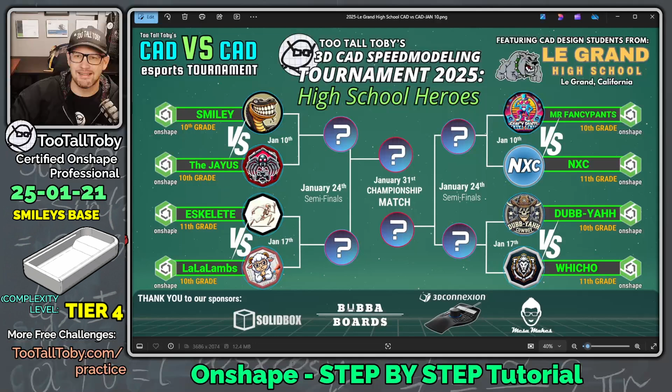And this case is in honor of one of our contestants in the recent CAD vs. CAD high school tournament. So the students from Le Grand High School all got together and competed. And each month I'm gonna go through and recognize a different competitor in this tournament, starting with this first month and recognizing Smiley. So Smiley plays electric guitar. I thought it'd be cool to put together a case that we can hold our electric guitar picks in.

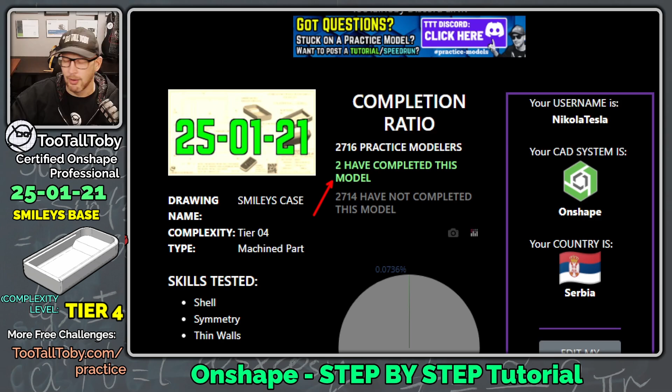So I'm gonna click Get Started here on Practice Models, and we're gonna go all the way down to the bottom. This is a Practice Models premium model. So this is 25-01-21, and 25-01-20, that was the lid. This is the case. So I'm gonna click here to practice, and we can see, wow, 2 people have done this already. So we're gonna become hopefully the 3rd person to successfully complete this challenge. And click here to begin. And go! What is the mass of this part in xx.xx grams?

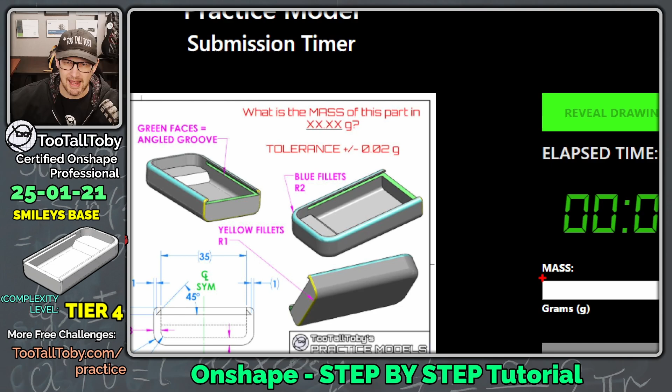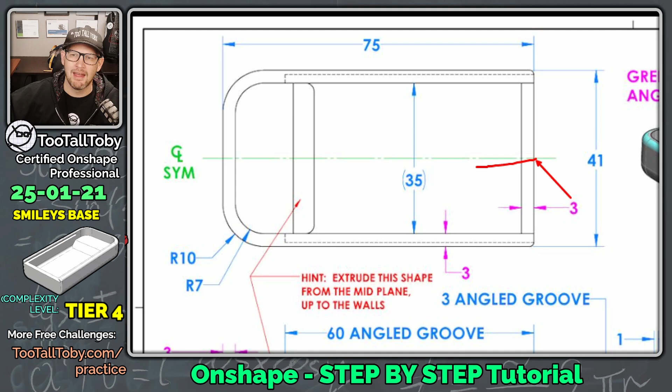So even though the clock is running, I think it's always good to come up with a game plan before we get started. And I think in the case of this model, I'm gonna start by figuring out where the origin should be. And I think the origin is gonna be located right here. The model has symmetry. I think it makes a lot of sense to just have the origin located right there. And so that means I think I'll use the same strategy as last time, where I'll just model up half of this.

So my first sketch is gonna look something like this. So I'll create that line that comes over, I'll create that 10mm radius, create this shape here. That'll set me up nicely for a mirror a little bit later on. Now, once I've got that sketch, 75 by 41/2, then what I can do is I can extrude that sketch down to this height here of 15.

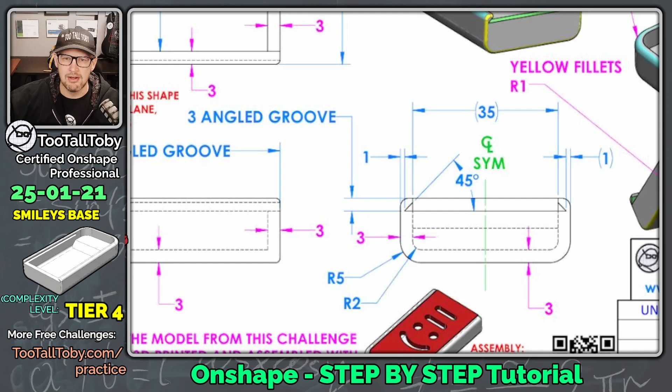And then, because we've got all these wall thickness 3, wall thickness 3, wall thickness 3, well, I should be able just to go in and do a shell, right? We can do a shell command and apply that wall thickness 3 all the way across the board. And you're gonna notice some dimensions like this radius 5 and this radius 2. Well, again, that's kind of reinforcing that I could add that radius 5 first, and then I could shell it and get that radius 2 on the inside.

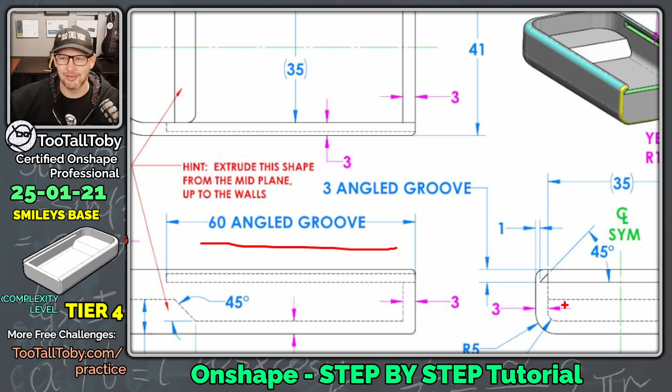Then I think the next feature that I would create would be this groove here. So you see we've got this angled groove. You can see here that the length of that angled groove is 60mm. That matches right up with the rail on the previous part that we created. And then we can see the geometry here for that angled groove. So it looks like it's 35 wide. I think that'll be the same wall thickness, or representing that 3mm wall thickness.

So yeah, in this view here, you can see this wall is the same wall as this wall here. It's all the same face. So that's going to be that wall there. And then that angled groove shape is going to look something like this. It's going to come over, up, over, down, because we're only doing half the model.

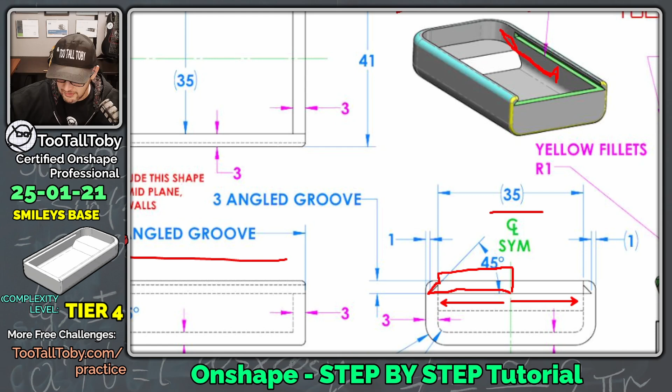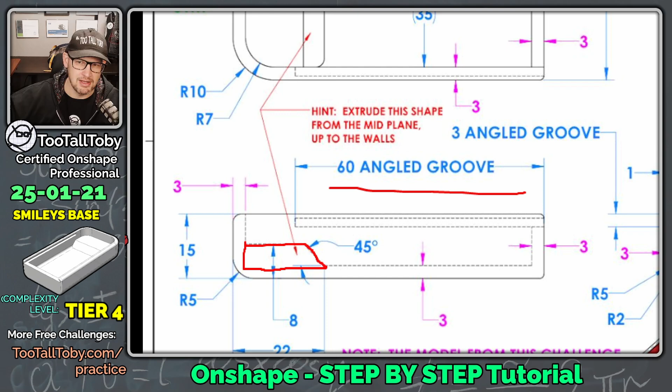And then we've also got this ramp here, this ramp that we talked about to get the picks out of that case. So to create this ramp, it even says here, hint, extrude this shape from the midplane up to the walls. So a nice little hint there. So I'll create a shape that'll look something like this, over, down, back over this way, up. And then we should be able to extrude that right up to the sidewalls and create that ramp.

And then the final features that are on this model are just these final fillets here. So we've got this fillet here, these blue fillets running around the top, and this radius 1. Since radius 2 and radius 1 are both smaller than the default wall thickness of 3, I think it's okay to save those fillets for the end. You probably don't want to have them in there before you do the shell, although I don't think it's really going to hurt you. But there are some CAD packages where that would be problematic.

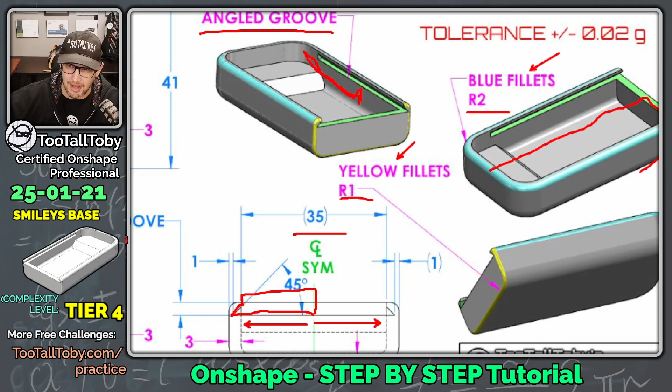So I'm going to save those fillets for the end of the model, and then I should have pretty much everything on one half of the model, and so the final feature will just be a mirror to mirror everything over to the other side. So I know we took a couple of minutes to come up with that game plan, but I think it's always good to come up with a game plan before you proceed with a 2D to 3D conversion.

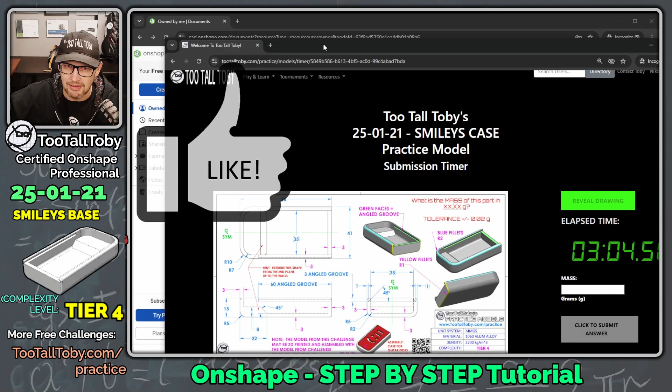And so now what I'm going to do is take this and move it over here to my second screen. Let's bring up our keyboard cam so we can see all the shortcuts that we're using here. And let's choose to create a new document. This is going to be in the public space, so if you get lost or stuck, you could always search for this document in the Onshape public space. I'm going to call it 25-01-21 Smileys case and create public document.

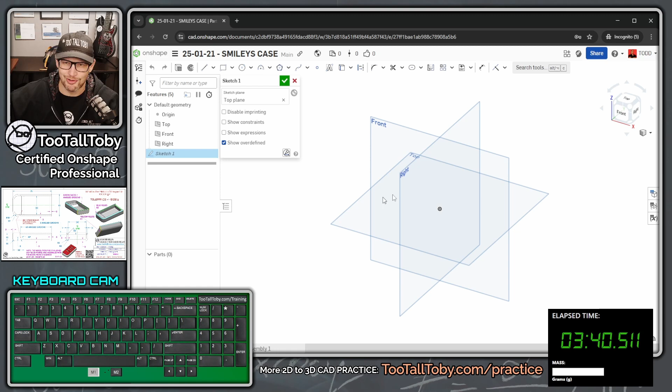And then the first thing I'm going to do is go up here to this hamburger menu and choose to set my workspace units. Workspace units are going to be set here to millimeters and grams. Hit the green check mark, and then I'm going to go top plane, begin a sketch, orient my view, N key, normal to. So I'm looking normal to the top plane. That's where I'm sketching. S key, line, single click, move my mouse over this way, single click, let go of my mouse, 75, enter, move my mouse down this way, single click.

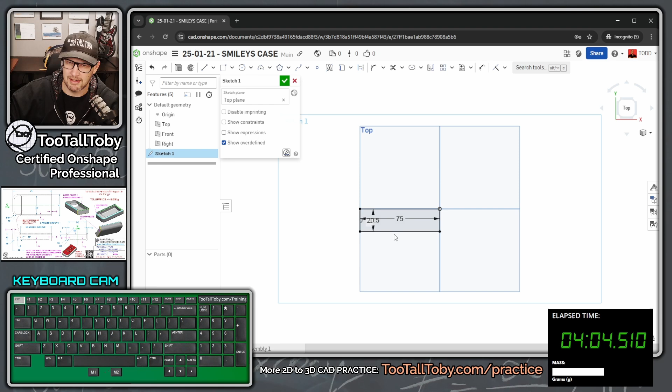This is going to be 41/2. I guess I could have just done this with a rectangle. Move my mouse back this way, move my mouse up this way. Nice fully defined rectangle there. And then I could either add in this fillet here at the sketch level, or I could add it at the feature level later. Honestly, I usually prefer to add fillets at the feature level, so I'm just going to do it as an extra feature here.

So S key, extrude. And this is going to get extruded down to a height. Actually, you know what? Before I move on here, let me go back into this sketch. I'll just show you one more trick. I showed this in the last video, but I think this is a good trick.

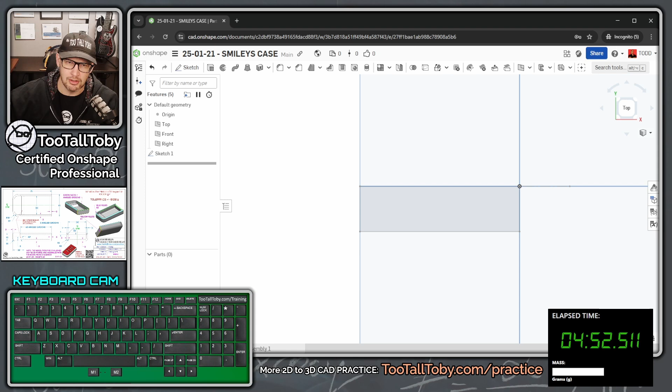If you're going to model half the model, but the customer has given you the full dimensions of the model, maybe what you want to do is create a construction line. So I press the letter Q there to change that line into a construction line, and then get rid of that 20.5 dimension and add in a dimension that goes from this line to the construction line, 20.5, and then go across the construction line. And that gives you a double dimension. And that might be a little bit easier to look at. It might be a little bit easier to work with the customer or confirm the customer's design intent.

So this is what your first sketch should look like. Take a look at my sketch. This should look very similar to your sketch. And now we're ready to S key extrude. Remember, I customized my S key menu, so S key extrude. And then after you jump into the extrude command, you can just press tab, tab, tab. And this is going to go to a height of 15, enter.

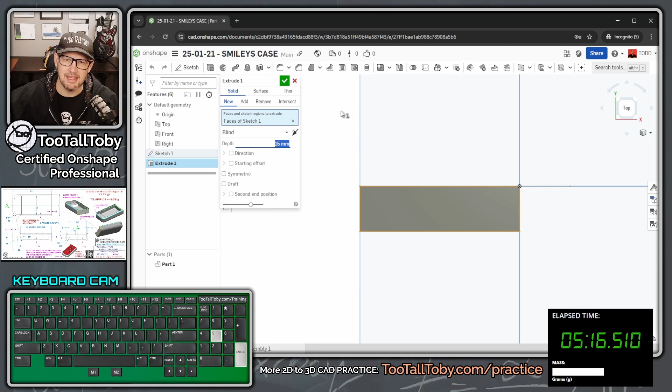And it doesn't really matter if you want to have that extruding up or extruding down. I'm going to have mine extrude down, but it doesn't really matter. It's just a personal preference thing. So if you're going in the correct direction, you're going down, then you can hit the green check mark. And there you go. We'll call that feature Shift N, call that main base.

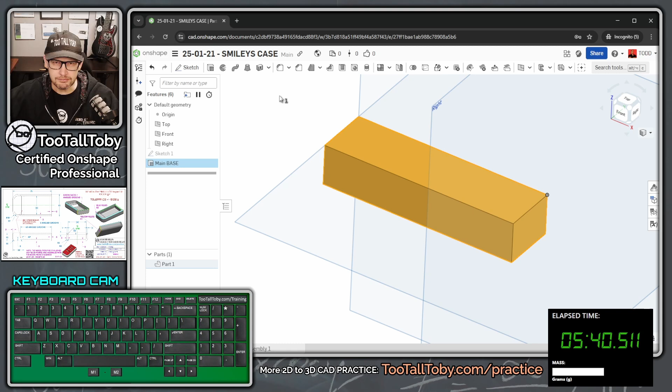And then what we could do is S key fillet, and we can say we want this fillet to have a radius of 10 millimeters, and we click on this edge here and enter. Yes, that looks good. And then we could call that one Shift N fillet front corner. And then we could do S key fillet, and make that one a radius of 5. And then we could click down here on this edge. It looks like that fillet runs all the way around. So because of tangent propagation, that's running all the way around.

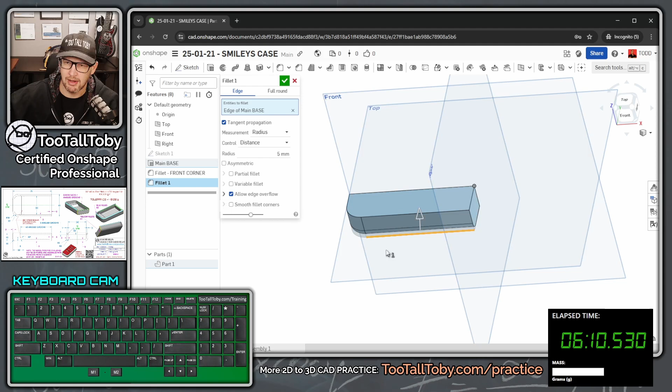So we can hit the green check mark, and then we could call that one Shift N fillet lower edge, something like that. Always good to rename your features. That'll really help you keep things straight. And so now this thing's looking pretty good. I think we're ready to shell this thing. So we're going to say shell, and the shell thickness here is going to be 3 millimeters.

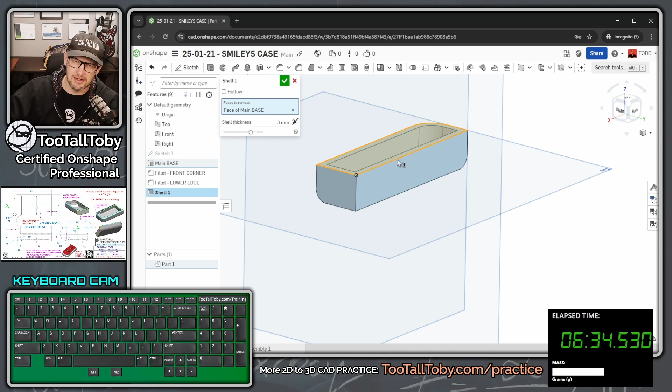And then we're going to remove this face on the top, obviously, but we're also going to remove this face here because remember, we're going to model half of this and then we're going to mirror it across. So remember to get that middle face as well. You should be removing both of those faces when you do that shell. And so once you do that, you can hit the green check mark and boom, there you go. There is your main shape there. I don't think we need to rename the shell. It's pretty obvious what a shell is. So usually I don't rename that one.

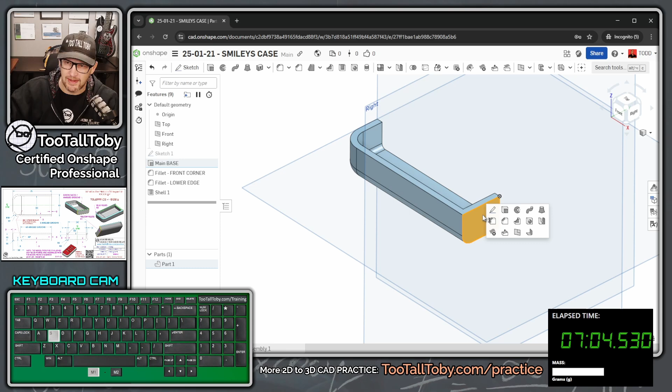So now I think we're ready to add in that angled groove. So you pick this face, S key, begin a sketch, N key, get normal to, S key, begin a line, single click here at the origin, come over to about here, come straight down, come over at an angle, come back over this way, come up to here. And then if you're going to be doing a double dimension, you could maybe create another line here and press Q to make that other line construction.

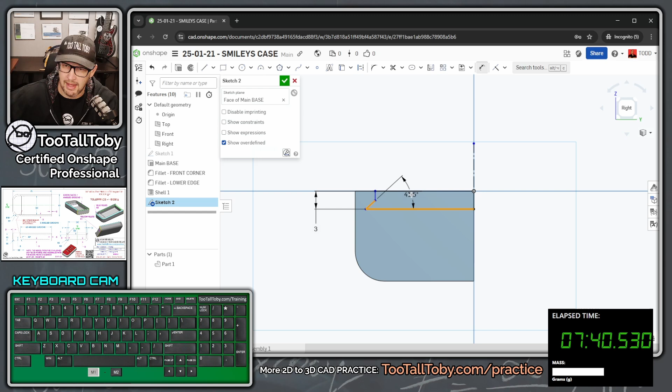I don't think we actually need a doubled line here for this one, because the dimensions that we add here are a dimension for the total height of the groove, which is 3 millimeters, and a dimension for the angle of the groove here, which is 45 degrees. I guess we do have that total 35 from here to here, which we could make collinear to the existing edge, but we could also just type in a dimension there. Both of those are going to work. And then we could create a final dimension from this side edge of the part to this point of the groove, and that is going to be 1 millimeter.

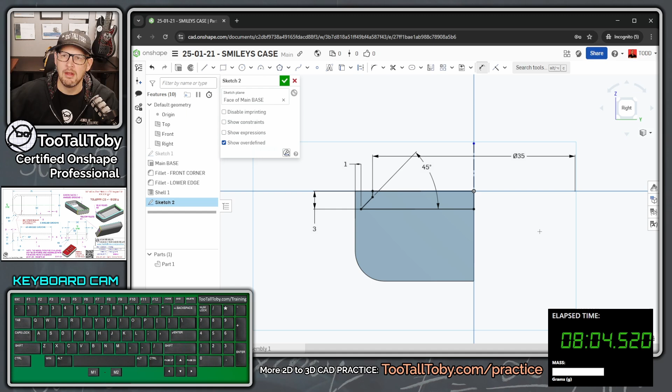So that's what the sketch for the angled groove should look like. Once you have all that geometry in place and fully defined, press the S key, go into extrude, and this is going to be a remove, since we're doing a cut, to a depth of 25 for the angled groove. There you go. That's going to be where the lid slides into place. Now we just have to create that.

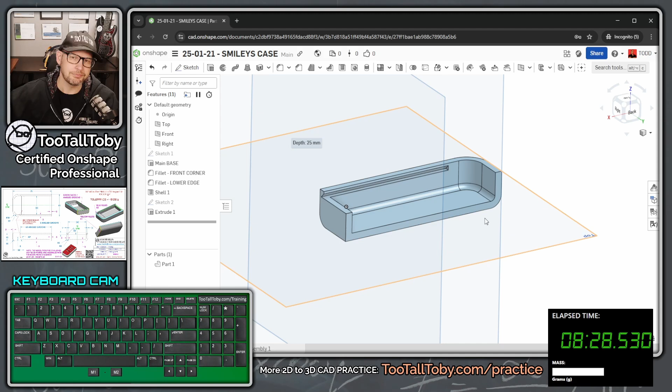Let's rename that feature. Click here, Shift N. We'll call this cut angled groove.

Then we can click on this face, which is kind of like the mid plane of the model. S key to begin a sketch, N key to get normal to it. Then press the S key and pick a line. Don't pick up on the midpoint here, go a little bit below the midpoint, come over, come down to an angle.

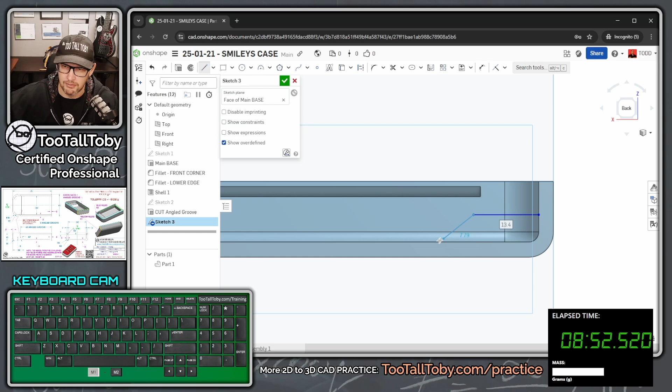Hit escape, S key, smart dimension, and we can dimension here at 45 degrees for that ramp. And we can say that's going to be 8 millimeters from the very bottom of the part, and 22 millimeters from this end of the part.

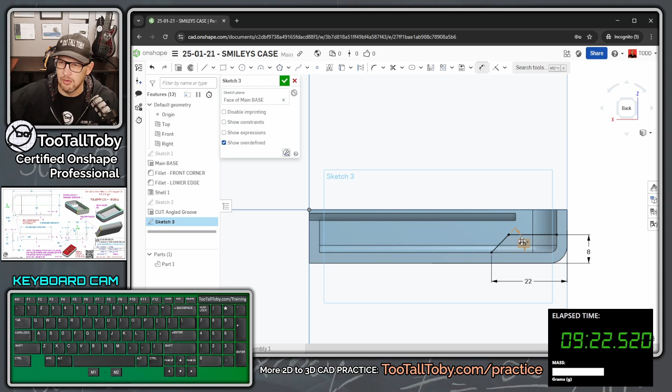I think that's all you need for that sketch. We can pick up on these other edges because they're part of this face that we're sketching on. Get that sketch to look like this, get it fully constrained, fully defined.

Then choose S key extrude. Press the space bar here where it says missing faces for sketch 3, just press the space bar. That's how you clear those selections. Then you can just pick here in this region.

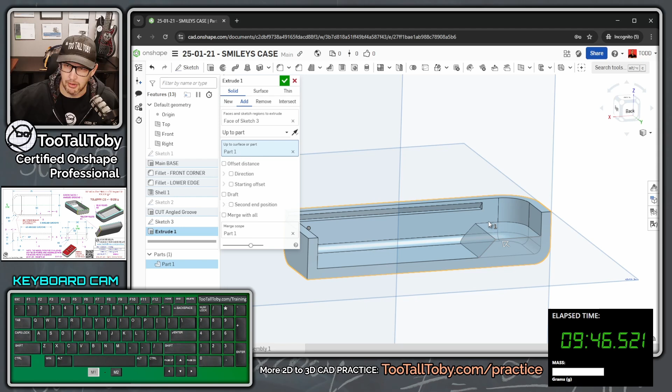So that's the region we're extruding, and we are going to extrude that up to part. Then you just pick here on the part. There you go, look at that. There's your ramp, right up to that part.

That looks pretty good, so we hit the green check mark, and then Shift N. We'll call this ramp area.

That's so that when you go to slide the picks out of that case, they just slide right out. You can do one-handed operation, using your thumb to open the case and a finger to pull those picks out, and they just slide right up that ramp. Works beautiful.

Now we need to add just a couple of final fillets here, going right along with the game plan. S key, and we will go fillet. Usually I add my fillets in order from largest to smallest.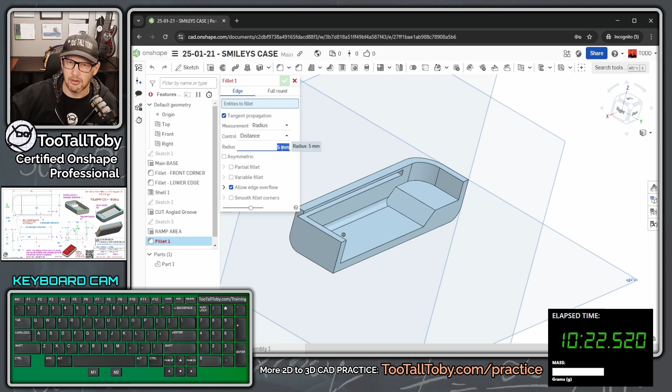So I'll make this one 2 millimeters here, and that 2 millimeter fillet is going to go around this edge, running all the way around the top, so if you keep this case in your pocket, it doesn't poke you in the leg. We hit the green check mark there.

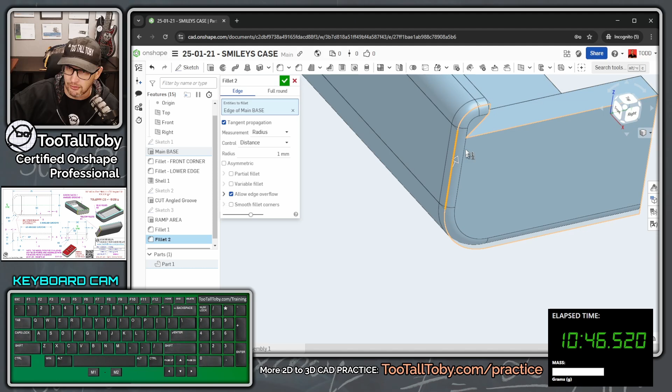And then a final fillet here on this end. So fillet, this one is 1 millimeter. Because we added that 2 millimeter first, we also give ourselves a nice edge that the 1 millimeter can wrap up and around. We hit the green check mark, and then we can choose the mirror command.

We're going to do a mirror here, using this part. For our mirror plane, first you pick the part anywhere, then come back up here, click mirror plane, and pick this face here. There is your mirror plane, mirroring that part over. We hit the green check mark, and look at that.

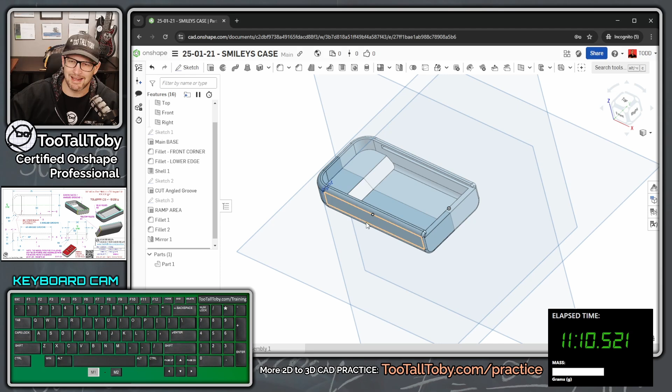So again, to rename these, you have to be a little careful. You don't necessarily want to name your fillet like fillet 2 millimeter, because what if that radius changes in the feature but you forget to change it in the tree? It's going to be confusing later on. So this could be like 'around top'.

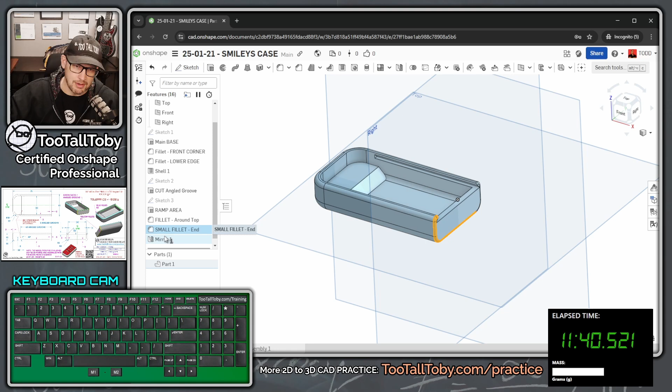And then maybe this one we could call small fillet end, something like that. Name it based on its general size, location, or function. That's a lot better than naming it based on the actual radius.

And then this mirror here, a lot of times I'll just call this mirror all, just so that I know that's my final mirror.

And so then if you want to, you can change the color of the part. That's always helpful with the customer. Right mouse button, edit appearance, and you can make this gray, like what the customer's calling out. You can press P and Shift P to hide your planes and hide all your reference geometry. And then finally, you can right mouse button on the name of this part and go to assign material.

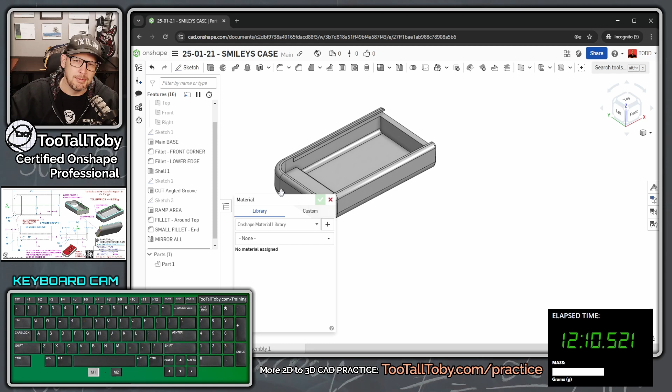And this material is going to come from the TTT custom materials library, and it's going to be 1060 aluminum. The reason we did 1060 aluminum is that it just worked out better for the weight calculation. When I did it out of ABS, it was not really coming up with a good number, so I just changed it to aluminum.

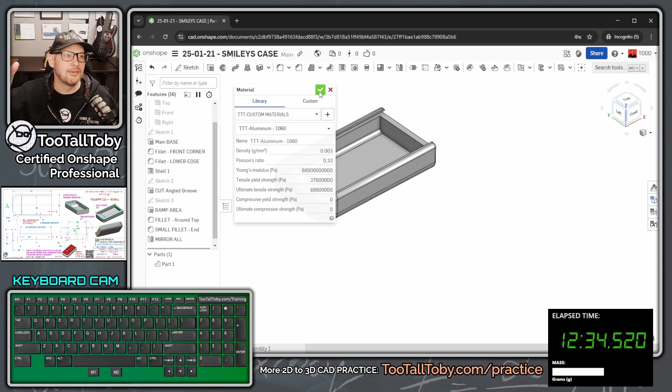But obviously when you 3D print this, you'll print it out of plastic, not aluminum. So we hit the green check mark here. I mean, I guess if you know somebody who's into machining, they could machine this part for you out of aluminum, and it would be an epic pick holder.

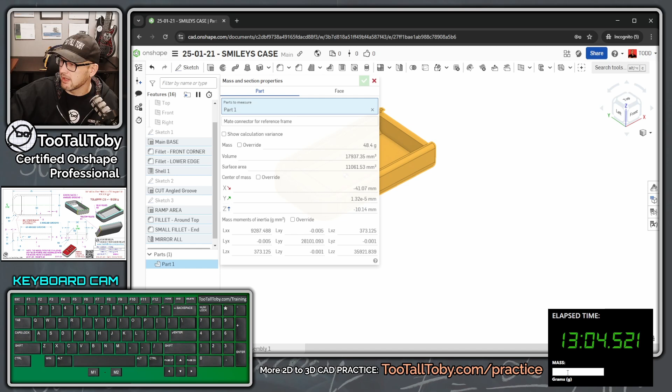So hit the green check mark, and then down here in the corner, you can choose the little scales. Click on the name of the part, and we're coming up with a mass here of 48.4, but it's actually asking for this in XX.XX. So if you hold your mouse over the number, you get a more detailed number over here. So 48.43, so we go over here to the answer, 48.43, and enter.

And oh yeah, we did it. Congratulations, this answer is correct. Yes, we did it. And so that is the tutorial on how to model up that part.

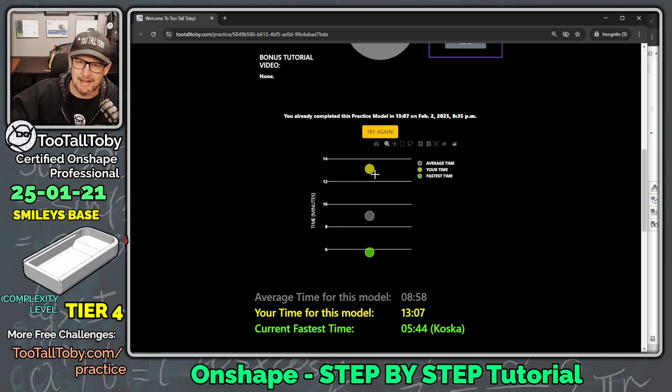Now, of course, once you're done with that, you can click submit here. And now that we have a few people who have done this, 3 people have done this, we can see how well we did against the other people. So my time was 13:07. The average time was 8:58. Wow, fastest time, 5 minutes and 44 seconds.

And this model just went up earlier tonight, so that's pretty impressive for having just gotten done with it. Looks like it was a SolidWorks user and an Onshape user. I love it, I love it.

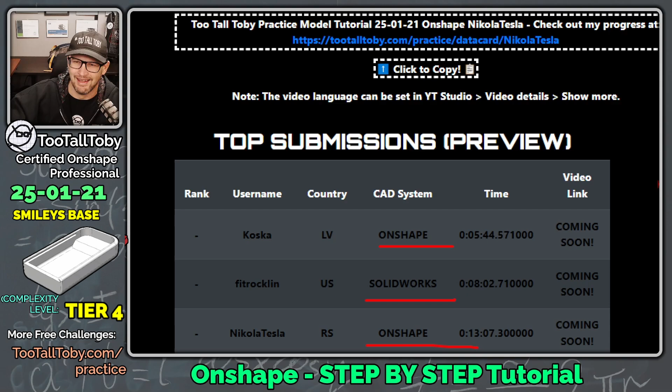So now what we can do is we can go back into Onshape. And then in Onshape, we can come down here to the name of the part, right mouse button, and choose export. And then once you choose export, you can choose here to export this as Smiley's lid. I'll just call this V1, it's the first version. Export it as either STL or 3MF for 3D printing.

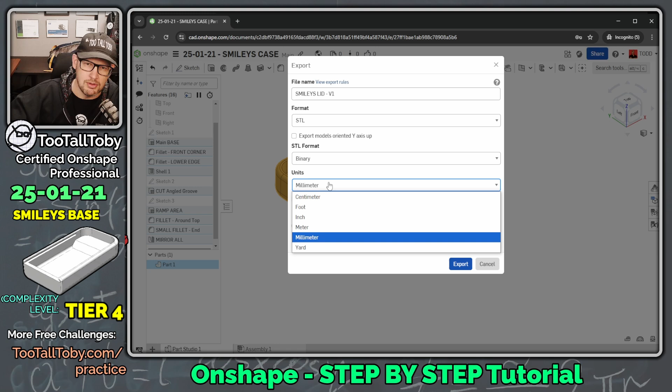So I'll do STL. Make sure your units are set to millimeters so it comes into the build table correctly, and make sure your resolution is set to fine, and then you can choose export. And then what'll happen is this will get exported. I'll just choose to save this here. We'll call this Smiley's Base V1.

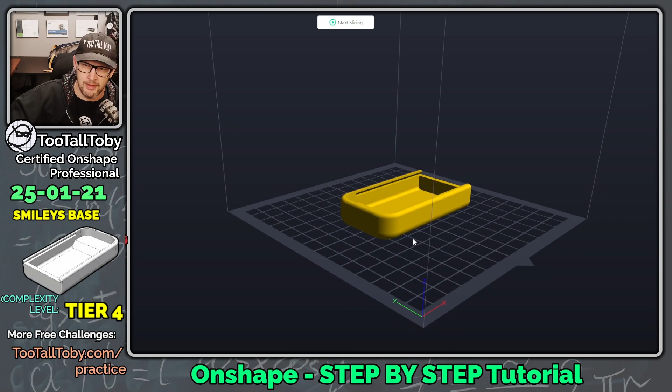So if you put it into your preprocessor and position it something like this, that should work nicely. You don't need any supports for this. Like this overhang here with the fillets, most 3D printers can handle that. And the overhang here for the groove, most 3D printers can handle that as well without needing any support material. So you don't need to go in and add supports. You can just print it as is, and you should have enough of an overhang there that the 3D printer, the FDM, can handle that.

So give that a try. Let me know how it goes. Post images of your 3D prints in the Discord. I always love seeing that stuff.